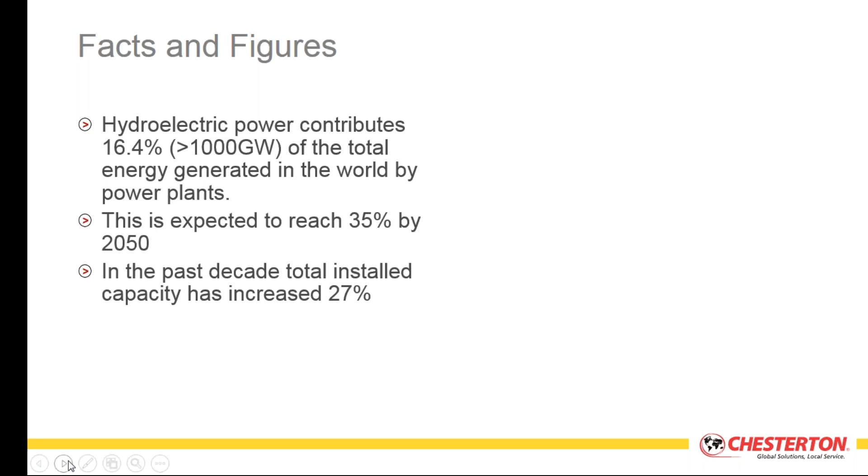In the past decade alone, we've seen an increase of over 25% of installed capacity. So it's a growing market space, and as it grows we're going to see more and more problems occurring. One of the first problems we're going to notice is that the water volume, the access to usable hydraulic head, is dropping. As we drop, that's going to have an impact on systems, particularly in the hydroelectric turbine runner blades, where you might experience cavitation.

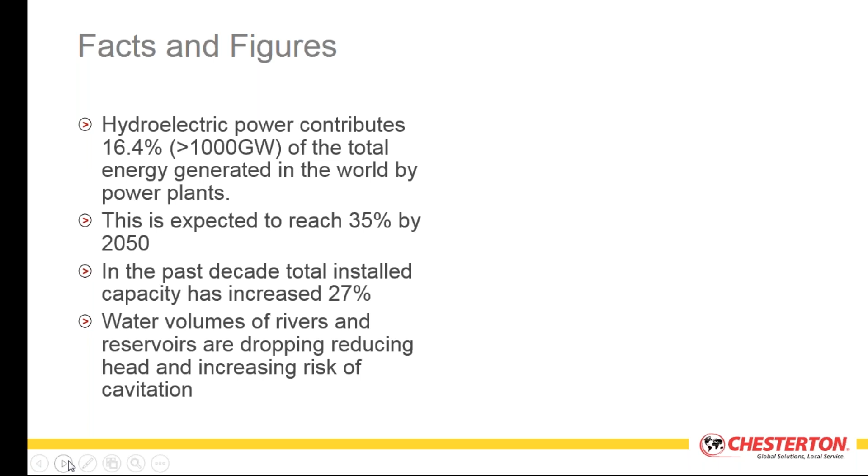But you'll also see decreased flow, and that's going to decrease the power off the grid. An example of this is you can see the water levels in Lake Mead in the United States that feeds the Hoover Dam. That water level has been down 27% in 2016. It's very seasonal, but protracted years of drought have caused that level to drop significantly, and that's having an impact on the Hoover Dam's power production, a 27% power reduction at that point.

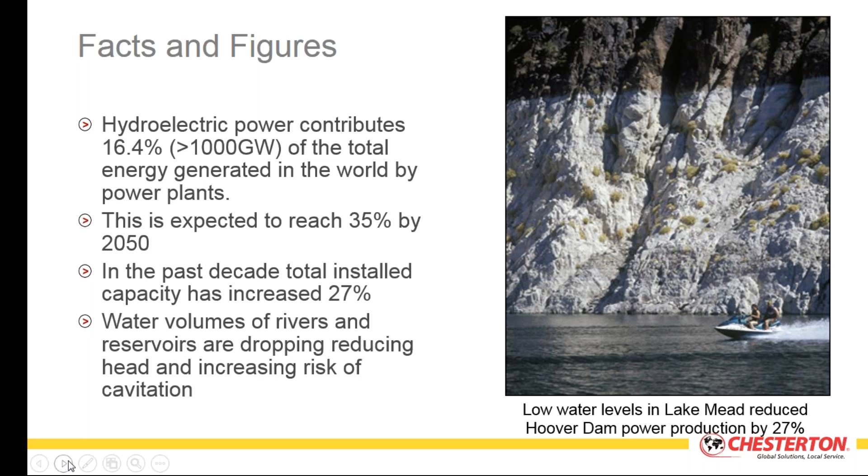So we have some issues to deal with, environmental problems. Some of those are Mother Nature, but some of these are going to be electrochemical issues that we'll talk about now.

Within the corrosion market space, the National Association of Corrosion Engineers did a study several years ago that looked at various industrial market segments and what the cost of corrosion was. It was identified that of the 3 areas reviewed in power generation - fossil power, nuclear power, and hydroelectric - by far the lowest cost of corrosion of the 3 was hydroelectric, but it's still significant.

In that instance, we're seeing corrosion in the maintenance of structures associated with the plant itself. This would be the powerhouse, the dam, and the associated structures - the electrical power plant itself, which would include both the electrical generation area as well as the hydraulic turbine area.

The highest cost impact overall is to the water wheels, turbines, and generators. If you look at the lower table there, you're seeing that comprises about 25% of the total cost of corrosion. On a weighted factor basis, it's the highest component of weighted cost of corrosion, so that's where we really want to focus. That's one of the high areas of visibility, and also one of the areas most prone to corrosion damage.

The NACE study, in its summation, estimated the cost of corrosion in your operations and maintenance budgets is about $75 million a year for the US. So if you took that $75 million and divided it by the megawatts or gigawatts generated, you could pretty much see what the cost of corrosion is per gigawatt generated, and apply the same numbers to your own region. So there is a significant cost associated with it, and it's important that we all recognize and understand that cost, because that's what we're trying to drive down.

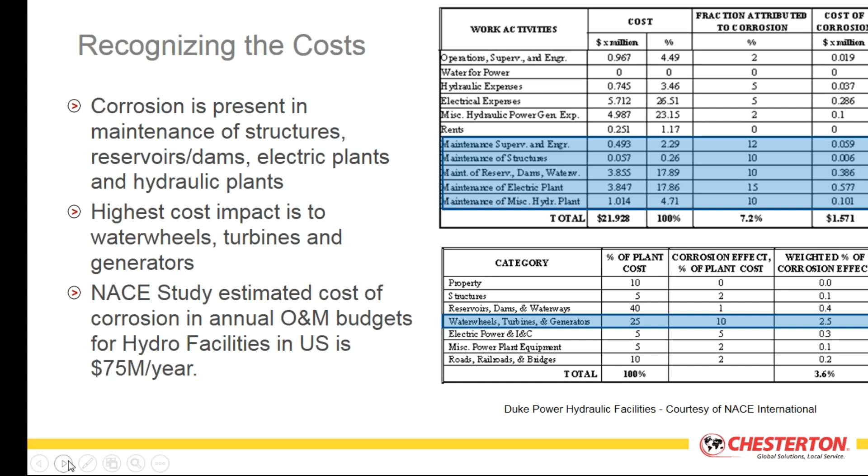We're trying to drive down our operational and maintenance budgets to make this power generation process a more cost-effective and cost-efficient method. Now, when we look at corrosion occurring inside the plants themselves, we do have some significant issues.

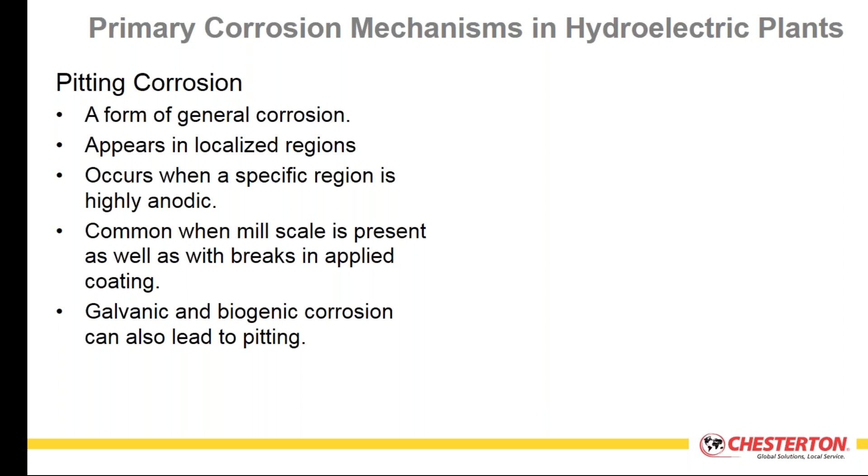One of the first forms of corrosion we're going to see is pitting corrosion. Pitting corrosion is related to general corrosion, but it appears in a very localized region, normally in a specific area which is highly anodic, meaning it is more active and more prone to corrosion. One issue that drives that problem is mill scale or oxides on the surface. Those oxides are passive. If those oxides are removed or broken free, a new area of exposed metal is exposed, and that becomes the new anode, and pitting corrosion will occur.

If those oxide layers are removed by erosive flow, by impact, by mechanical stress, you have a small anodic region which is now exposed, and pitting corrosion will be initiated. There is an active ion transfer from the bottom of the pits to the top, and in those lower regions, the pH will be measured significantly lower than the pH at the top of the pit, and that will increase the electrolytic reactivity, which accelerates the corrosion cell.

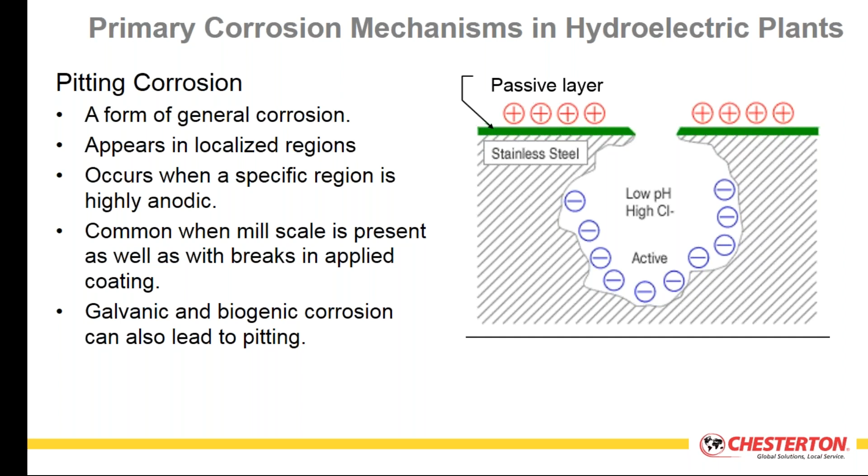Pitting corrosion tends to be more localized. It tends to drill down into the steel as opposed to spreading out generally across the surface, and it can lead to pinholes, breaks, and significant catastrophic failure. It's very difficult to identify and catch in time unless you're doing regular inspections, but pitting corrosion is one of the areas we will be focusing on as restitution correction methodologies.

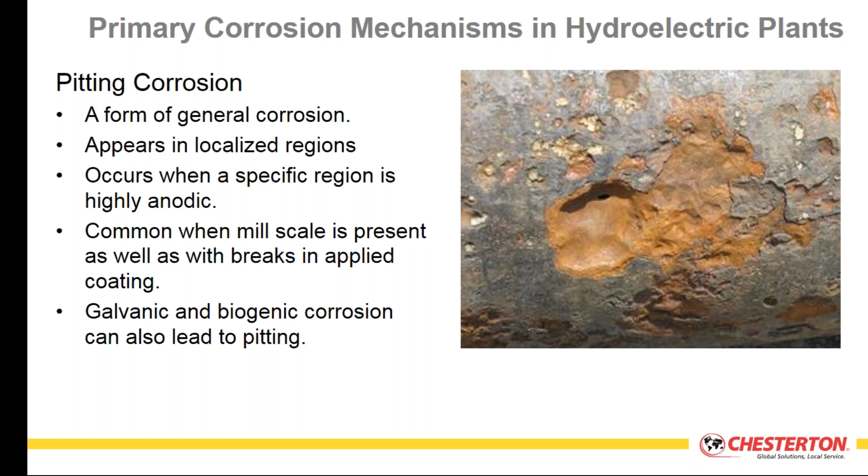Here's an example of what pitting corrosion looks like. You can see the associated scale on the surface, and where that scale has been removed, the new area has become exposed - that's the anodic region. At the bottom of that anode, you can actually see the hole penetration through, and that's a piece of 9mm plate steel, so that's a significantly reactive pit there. It's probably in the range of about 12 millimeters across, roughly half an inch, and about 9 millimeters deep, so about 3/8 of an inch deep, right through the steel.

Another form of corrosion that you might see in hydroelectric facilities, not just in the actual operational equipment but also in the supporting structural steelwork, is crevice corrosion. This also occurs in a localized region, and it's typically caused by low concentrations of oxygen, which are present in the gaps or crevices.

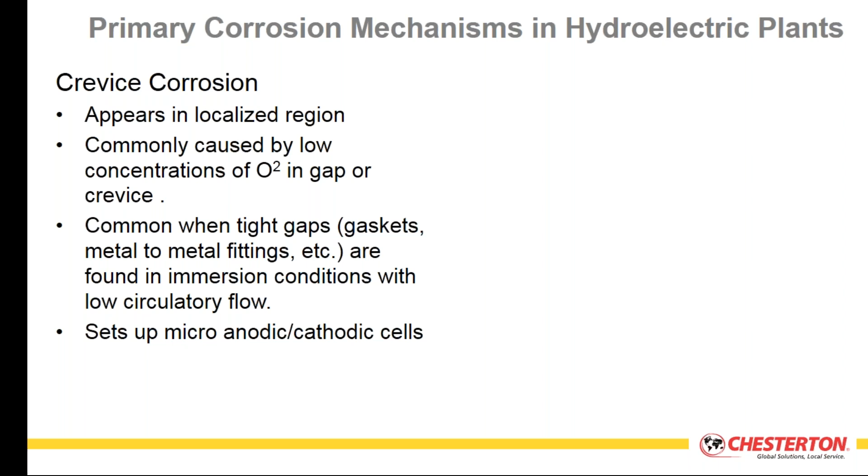Where are you going to see these gaps and crevices? You'll certainly see them in gasketed flange faces, metal-to-metal fittings. You may also see them in areas where you have stagnant flow or no flow conditions. When those types of situations occur, you'll set up very small micro anode-cathode cells, and that will also lead to a form of localized corrosion, called crevice corrosion because it typically occurs in these regions noted as crevices.

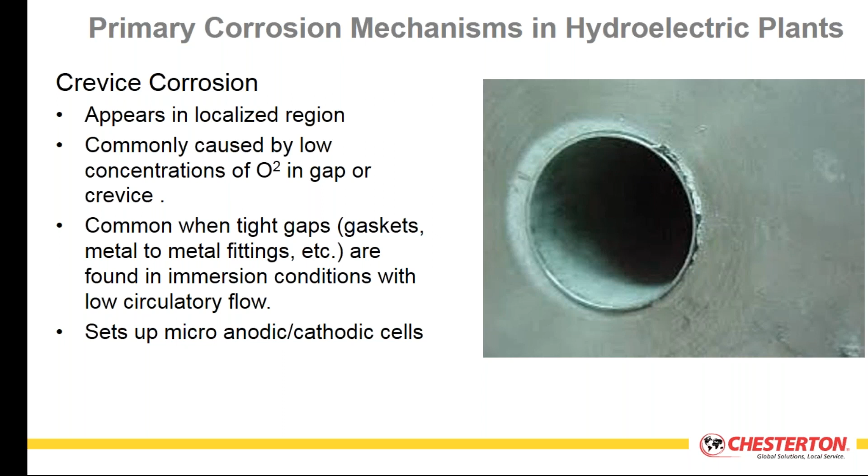An example of this in a heat exchanger system would be the welded joint between the tube and the tube sheet plate. That small crevice region becomes depleted in oxygen. You'll get active corrosion cells generating in there, where areas become more anodic than cathodic, and that precipitates the corrosion. You may also see it in structural steel reinforcing areas where you have gaps on riveted structures or skip welded structures. Those gaps become zones of low oxygen concentration, and you'll get oxidation and corrosion occurring.

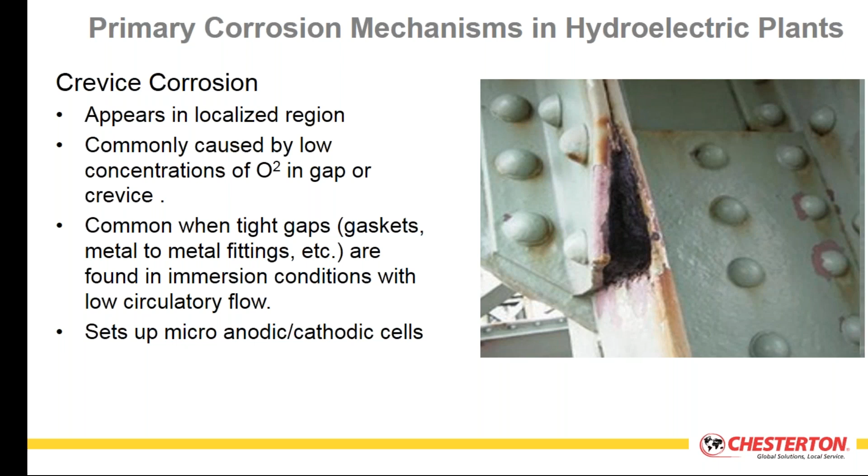As the metal oxidizes and converts to a metal oxide, it expands volumetrically, and that causes stresses and can actually break and pop rivets and cause structural failure. So crevice corrosion is also a problem. Some of these issues can be addressed by conventional maintenance technologies, but some may require more advanced technologies. A third form of corrosion that we sometimes see is galvanic corrosion.

This is a fairly common form of corrosion. It's typically related to dissimilar metals in contact with one another. These dissimilar metals have differing electromotive potentials, and that electromotive potential drives the corrosion rate. Certain metals are more active, certain metals are more passive. An example would be a pure alloy like gold, platinum, or silver - those are pure metals and tend to be very cathodic.

When you move to the very active anodic region, you're looking at metals like magnesium or zinc, which are highly reactive. If there is a significant differential between the anodic material and the cathodic material, the rate of corrosion will be quite high and fast. If the electromotive potential differential between the two metals is quite close, then you'll have slower corrosion rates, but you will still have corrosion because there is a differential in electromotive potentials.

In order for this to occur, it normally requires some type of conducting electrolyte - water is a very convenient one. Obviously, the more acidic or higher ion concentrations you have in the water, the more rapid the rate of corrosion will be. Another requirement is metal-to-metal contact, so you need these differing alloys in direct contact. They can't be separated by any dielectric insulator because there is actual current flow occurring between the anode and the cathode. So for galvanic corrosion to occur, you need an anodic metal, a cathodic metal, a metallic path which is the metal-to-metal contact, and a conducting electrolyte.

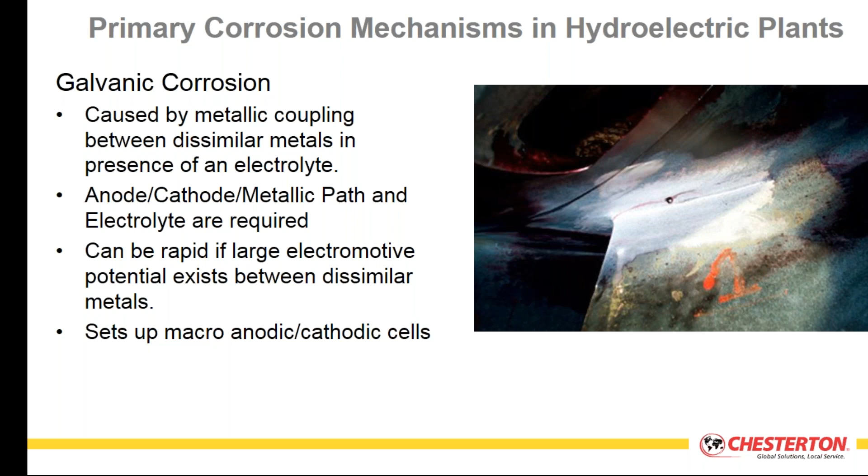Another form of corrosion that we see in hydroelectric facilities is erosion corrosion. This is typically caused by the corrosion mechanism, which is metal's natural state wanting to revert back to its passive native state.

If that's a ferrous-based oxide, you typically look at ferrous oxides. If you're looking at stainless steel, you're looking at chrome oxides. When these oxides form on the surface, they become passive, and these passive layers are the metal's own natural method of trying to provide protection. It creates a passivated layer on its surface, which is no longer reactive to the environment. However, that passive layer is very weakly bound to the base metal, and it can be easily washed away.

So in turbulent flow regions, which are quite common in hydroelectric facilities, that can wash away that weak oxide layer. If there is any type of sand, silt, or suspended solids in the flow, you'll start to introduce abrasive conditions, which will accelerate that erosion rate. Once that passive oxide layer is removed, you'll see accelerated corrosion occurring in that region where the oxides have been removed.

This is a repetitive and cyclic process that occurs over and over. As the oxide layers are removed, the metal is thinning, structural conditions are being reduced, and so we have to be concerned about this. This is most common in your very high turbulent flow application areas.

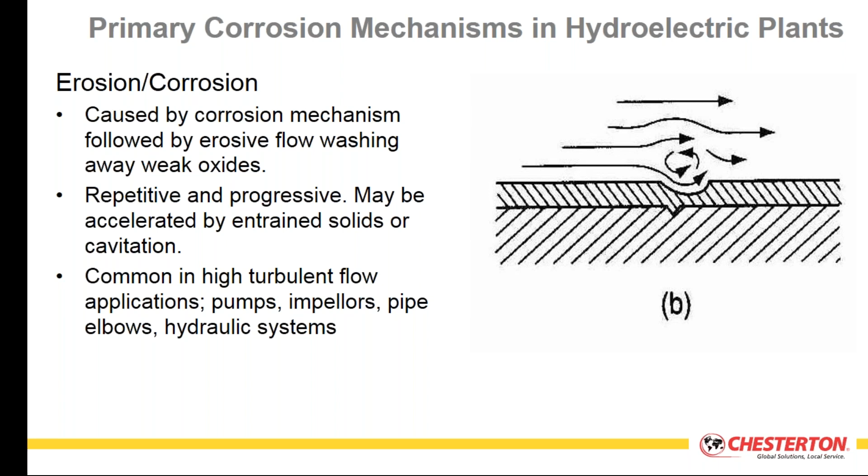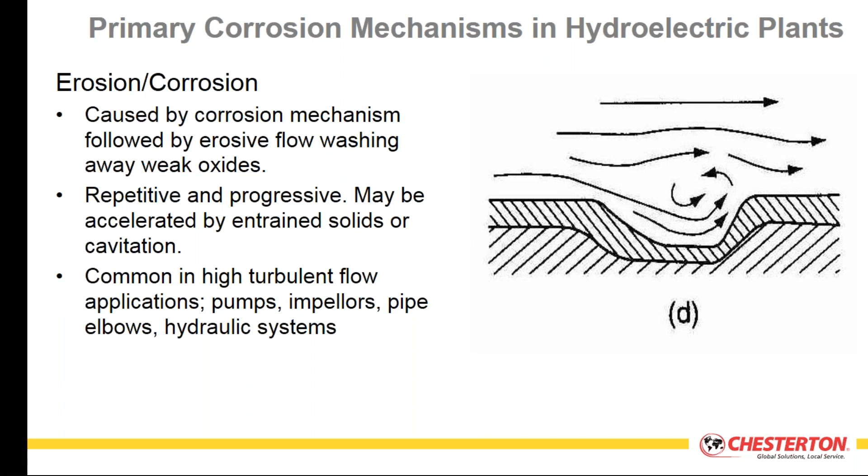This progresses over time until eventually the oxide layer is removed, and now you're starting to remove the base metal because that base metal is repetitively oxidizing, and then that oxide layer is being removed, and the cycle repeats itself over and over again. Eventually, you will see accelerated erosion factors occurring in localized regions, and these are areas of specific damage that we need to be able to address.

But you will see erosion corrosion occurring in your hydro runners. You'll see erosion corrosion occurring across the wicket gates. You'll see erosion corrosion occurring in your scroll casings around the turbine runners.

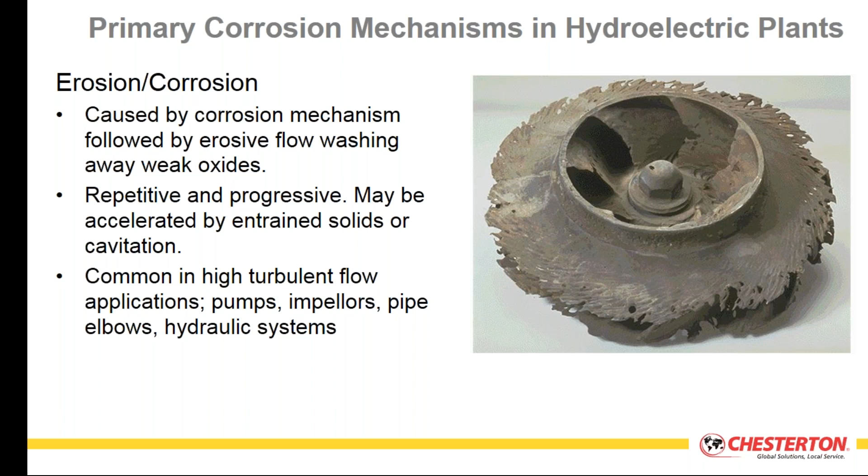Another form of corrosion, which is actually a mechanical method of attack, is called cavitation. Cavitation is quite common in hydroelectric facilities. It's typically caused by low pressure regions which develop in the trailing faces of the turbine runner blades. The air bubbles in the water implode on the surface under extremely high force.

Forces of several 100,000 psi have been calculated, and it's also been established that for microburst periods, extremely high temperatures are also generated across that surface. So those two forces of mechanical stress and thermal stress actually accelerate the damage to the metal. Once that metal becomes roughened, you start to promote more cavitation, because cavitation likes to operate in rough, irregular surface regions where turbulent flow is more prone. So if you can keep a surface smooth and uniform, that will reduce the effects of cavitation.

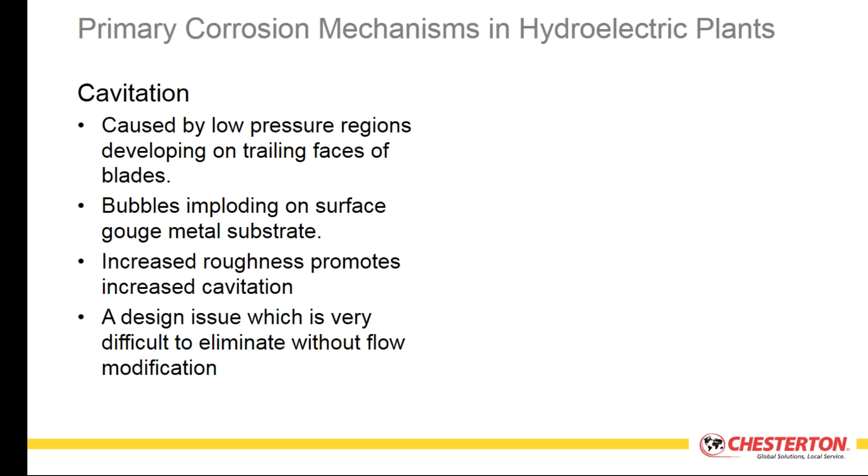First and foremost, though, it should be recognized that cavitation is a design issue. It's an issue that should not be counted on as being able to be eliminated by any restorative method. All you're doing is repairing the damaged area, but damage will occur again. It's very difficult to eliminate cavitation without impacting or improving your process flow to eliminate those low pressure regions.

When you see cavitation occurring on a hydro runner, you'll see the surface looks like it has been frosted or etched. It typically is in fairly localized regions near the trailing edge of the turbine runner blade, on the low pressure side. These are areas where we want to be able to address, because these are areas of high likelihood of damage occurring in your hydroelectric plants themselves.

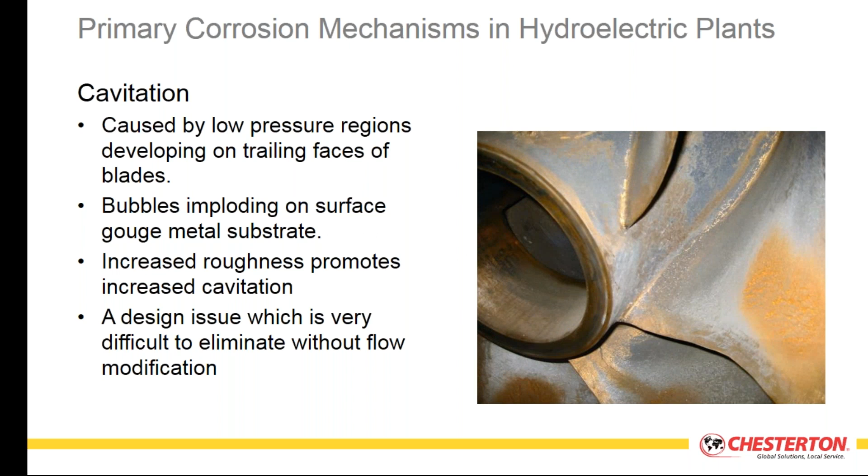You can see the level of damage and how it can be severe and actually penetrate through the actual runner blades and cause structural failures.

You'll also see throughout the plant what we call general corrosion. This is the exact opposite of pitting corrosion. It's much more uniform across the surface because areas across the metal are becoming anodic and cathodic, constantly changing. The rate of attack is much more measured and progressively slow. It tends to occur uniformly or generally across the entire surface - it's not localized.

The same corrosion factors are occurring in that you're finding areas which are anodic and cathodic. The anodic region is sacrificing itself, in effect rusting or oxidizing away, while the cathodic area is protected. The issue in general or uniform corrosion is an area that is cathodic may become anodic, and an area that is anodic may become cathodic over time. So it is very random across the surface area.

The overall effect is the metal loss is relatively slow, and it's easy to assess lifetime. In design factors, if you know what the general corrosion rate is, you can design your structures with enough metal to absorb that loss over the lifetime expectancy of the equipment. But when we see general corrosion in hydroelectric facilities, it's mostly attributed to structural steel type applications.

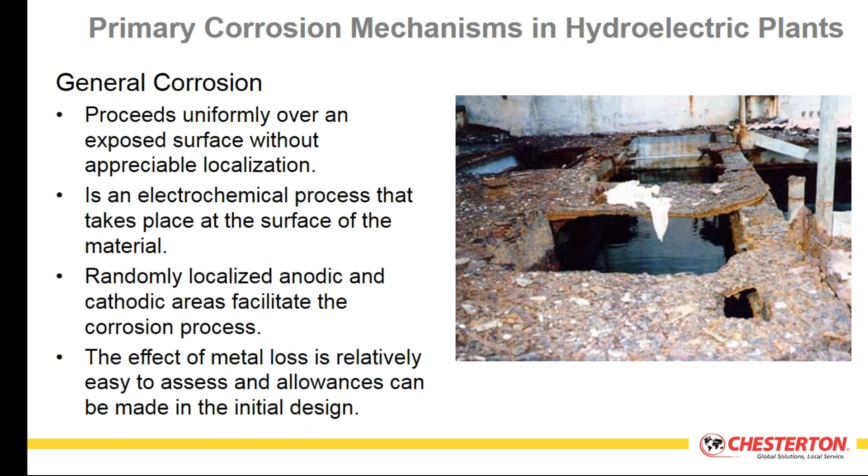Another form of corrosion we'll see in steel, particularly steel areas, is stress corrosion. It's called stress corrosion because it's actually a combination of mechanical or thermal stresses, which can be accelerated by certain environmental conditions. One of the most common stress forms is tensile stresses, where the metal might exceed tensile stress, and this would be quite common in what you see here - a Francis runner blade, where you have an area of stress corrosion occurring at the regions of weldment.

It's important to understand that in any welding application on any metal surface, the heat affected zone of the weld, which is a region roughly 5 centimeters or 2 inches away from the actual weld pool, these regions are more prone to corrosion due to insufficient or improper heat treating. So you'll have areas within the metal grains themselves which are much more prone to corrosion than the actual grain itself. It's the grain boundaries that create the corrosion cells.

This can be eliminated by effective heat stress relieving - heat pre-treating prior to the weld and then post-treating after the weld - and making sure that the welding itself is done properly by highly skilled individuals using the proper equipment and welding materials.

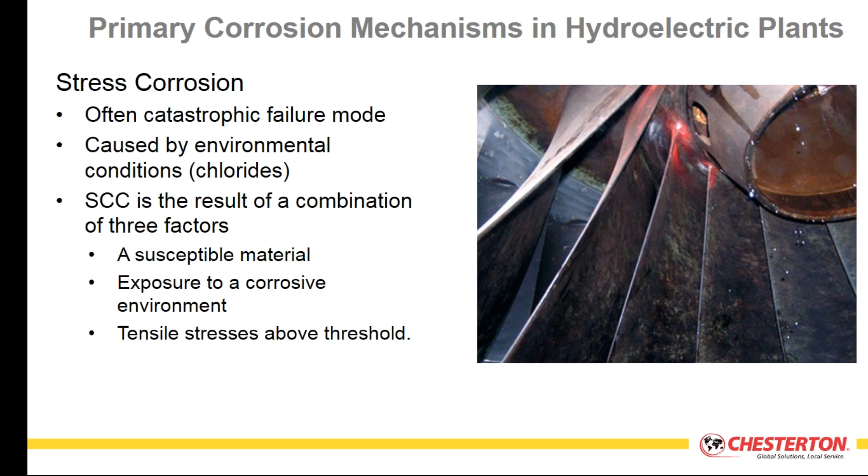There are some traditional engineering and maintenance practices and activities commonly used to address some of these forms of corrosion in your plants. The most common one is cavitation repair, and we'll talk about that in some detail because this is probably one of the larger issues you'll see in the powerhouse system.

The most common cavitation repair technologies are a metal-to-metal process where you're actually repairing the damaged metal with another metal, accomplished through a weld overlay and grind process - welding on beads of metal onto the damaged area and then grinding everything flush and smooth. Another option is simply replacing the worn parts. Obviously that has a cost impact and potentially a lead time and scheduling impact, so it may not be the first choice, but it might be an ultimate choice in severe situations.

Becoming more common is the utilization of thermal spray technologies, which we'll talk about in some detail now.

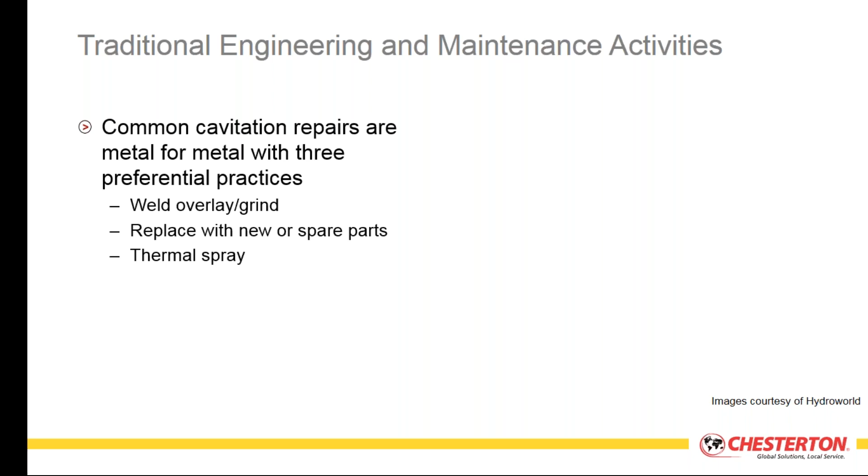Your basic weld grind area requires fairly extensive rigging. There's specialized technologies and skill sets required. You are generating a somewhat hazardous work environment due to the welding fumes and obviously the fire and flame that might be present, so environmentally and to the worker itself it could be a potential safety hazard.

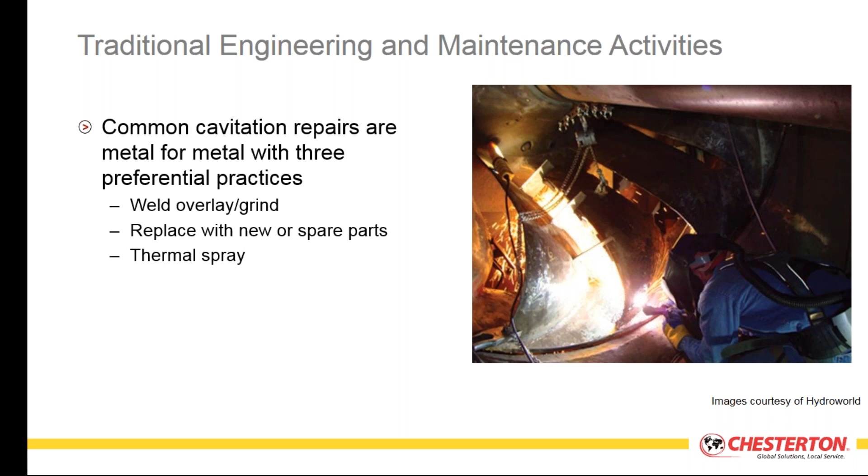But as far as the actual process itself, if it's done properly and effectively, it can be quite beneficial. If it's done ineffectively or improperly - meaning they don't provide proper pre-treating or post-treating of the steel, or don't use the proper weld materials or welding techniques, or are unable to grind everything smooth and flush again - they can actually accelerate and make the problem more difficult and more progressive.

You can see some of these weld areas and grind areas are quite significant, so there's going to have to be a significant amount of post-treating after the welding as well as pre-treating.

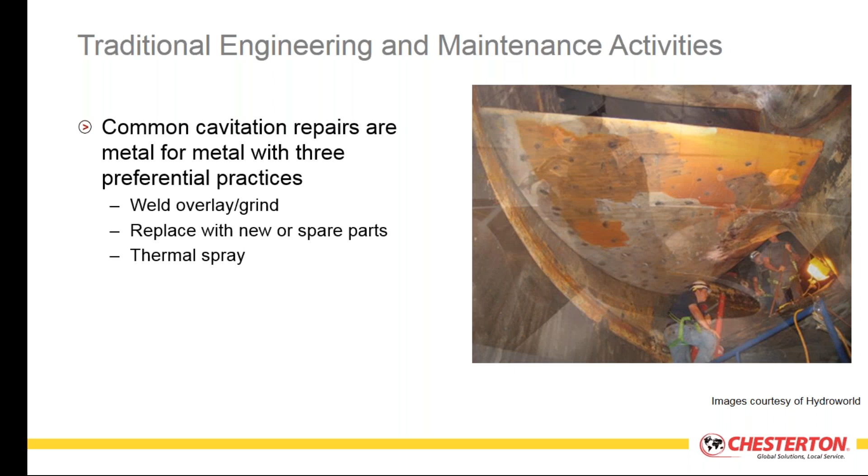Thermal spraying has become more and more common. It's basically what's called a high velocity oxygen fuel derived method, where you are passing under high velocity airflow either a metal powder or a rod fed into a high velocity airstream. As it passes through an arc, that metal rod, wire, or powder is liquefied in that arc flame and is then thrust and forced upon the surface, where it coalesces as a hard metal.

Common metals used here are tungsten carbide, chrome carbide, but in some instances, in certain industries, they're doing thermal sprays with ceramic-based materials.

When using this system, it's very important to have the metal surface preheated so that it is properly wet out by the liquefied metal when it impacts on the surface, and it properly cures there. One issue with thermal spray-based systems is they tend to be quite porous, so if corrosion is occurring, the thermal spray system may not be as effective.

It is possible to build these thermal spray systems up in successive layers to several millimeters or fractions of an inch, and they can be quite beneficial in certain highly abrasive applications.

Some of the concerns we have with these metal-to-metal repairs, obviously, is the heat distortion factor. We're concerned about that, and it has to be resolved and addressed by pre-treating and post-treating.

We're also concerned about the heat-affected zone, the actual weld pool, and the region directly adjacent to it. Those areas are more prone to corrosion, so we need to be confident that the weld has been properly inspected and verified as smooth and clean. We do that so we can eliminate the effect of stress corrosion at the welds.

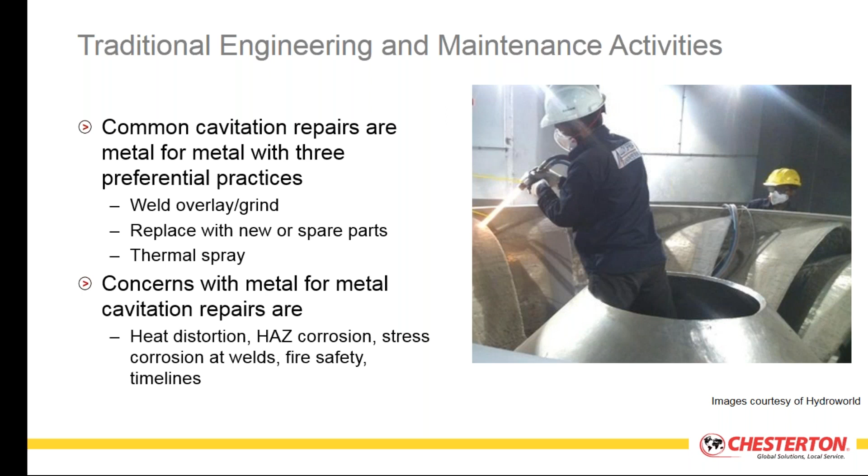We're always going to be concerned about worker safety in these areas. If we don't have to introduce flammable or explosive gases, or create hazardous or toxic welding fumes, that can be a big benefit for improving turnaround time and worker safety.

Beyond the traditional metal-to-metal repair approach, we want to talk about some of the polymeric approaches, because polymers are plastics, and plastics are quite resistant to many forms of corrosion. Virtually all of the forms of corrosion we've discussed so far—pitting corrosion, crevice corrosion, galvanic corrosion—are easily addressed by polymeric materials.

Stress corrosion may be more of a problem because you're not addressing the structural aspects of the base metal. All you're doing is putting a surface enhancement on it. Cavitation is another area that can be addressed by polymeric coatings, but you're not eliminating the forces of cavitation—you're reducing the effects, allowing the coating itself to be the sacrificial material as opposed to the base metal.

So polymers are quite popular because they naturally resist corrosion, and there's a wide range of polymer-based systems. Probably the most common are the epoxy-based materials, which are co-reactive polymers based on bisphenol A, bisphenol F resin chemistry. Normally they're an amine-cured structure, so they're what we call chemically co-reactive coatings.

When the two components are mixed together, they start a chemical reaction which will convert that material from a liquid to a solid-based compound over time. They're called thermoset-based polymers because during that reaction process, they actually generate exothermic heat reactions, which participate in and accelerate the curing process.

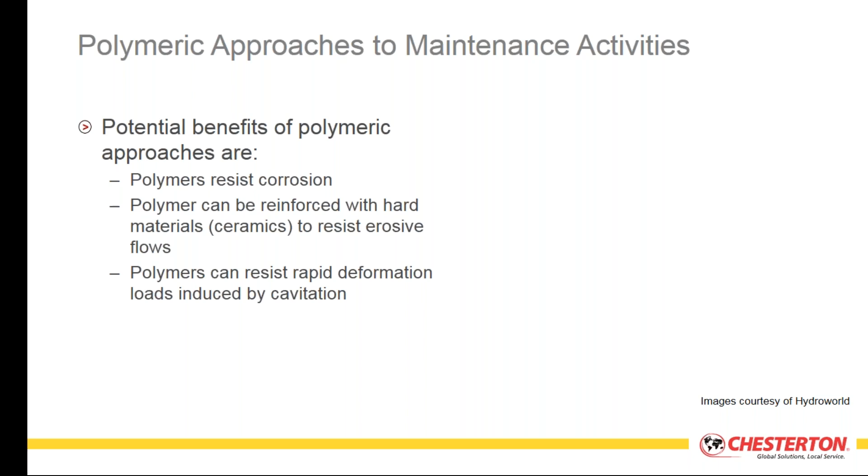However, if cavitation is relatively slow and progressive, you may be able to use a polymer-based compound quite successfully to address and repair those zones of cavitation, with the understanding that when you come back in on a maintenance cycle 3 or 5 years later, you may need to do some more touch-up to those areas. Now here's some examples of polymer-based coatings on hydro runners.

You can see them being used on wicket gates for corrosion resistance as well as erosion resistance. You can see them in some of the scroll casings and vanes, turning vanes inside the runners, where you're seeing areas of high erosion and high abrasion.

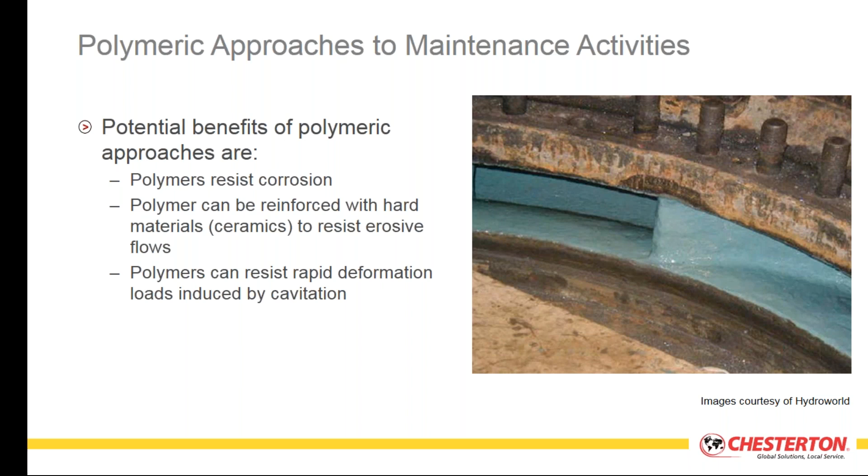These materials could be multi-coat systems. You may be using a paste grade or putty grade material that is used to build up worn regions, in effect using the same technique that's used in the welding approach, where you're building it up and then grinding back down. With coating systems, you can build it up and finish it to the desired thickness. If you do require machining or grinding, it's quite easy to grind, and you're not generating heat stress into that base metal, because the polymer itself is not going to react that way. So the polymer-based compound gives you more flexibility.

Now, there are very defined coating characteristics that we want to see in a hydroelectric coating solution. We want to make sure that the product is able to be applied in confined spaces.

And this is a great concern, particularly based on the accident that occurred at the Xcel Energy about 6 or 7 years ago out in Colorado. In that instance, several workers were killed in a fire that occurred in a penstock. The fire occurred when a flammable solvent was ignited inside the penstock. The workers who were downstream of the fire were able to be evacuated, but the workers who were upstream had nowhere to go, so they moved upstream from the fire to the point where they could no longer climb up the incline. That's where the rescuers eventually found them in the recovery process.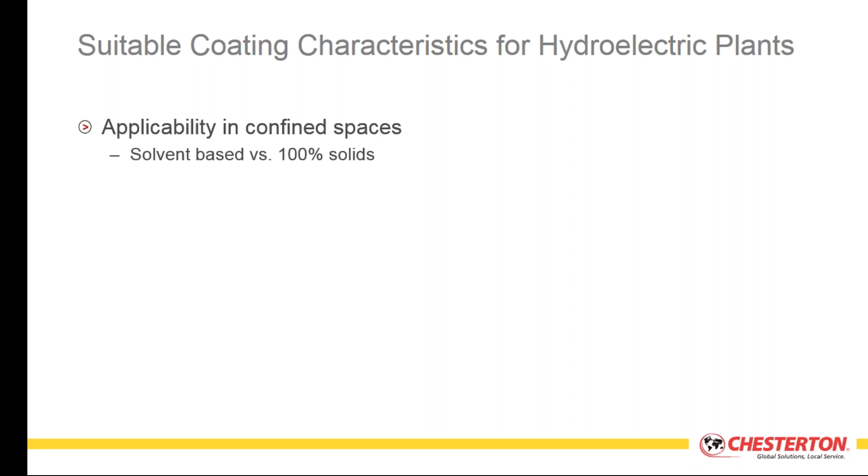It was essentially due to the fact that they were bringing flammable-based compounds into a confined space. So whenever you can remove the presence of flame in a confined space, you're obviously going to improve the safety and the work environment. We want to avoid fire, we want to avoid explosion, we certainly want to avoid toxic fumes whenever possible.

We want to make sure that the coating system itself has very high adhesion properties, because the most common mode of failure of any coating on the surface is loss of adhesion. It tends to delaminate. Sometimes that loss of adhesion is due to improper surface preparation or the degree of surface preparation that was accomplished. But it's very important to ensure that you have very high tensile adhesion forces of your coating system to get a positive bond to the base metal to provide long-term performance.

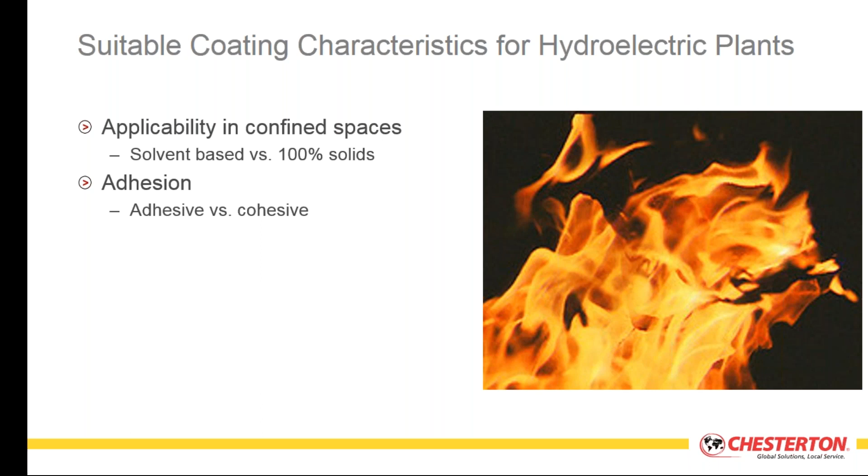You want to see, whenever possible, cohesive failure as opposed to adhesive failure. And the beautiful thing about epoxies is that they were developed initially as an adhesive compound. That's what they were developed for back in the early 30s. These adhesive compounds develop extremely high tensile strengths so that then when they fail—and all coatings will fail, all materials will fail at a certain stress point—with these types of coating systems, they fail cohesively.

And that's what you want to see. So the left-hand image is the mode of failure that is desirable in a coating system. It means that the coating's adhesive properties are greater than their cohesive properties. So even if the coating does shear somewhat, there is always a protective layer left on the surface which will provide protection of the base metal.

And the nice thing about these epoxy-based coatings is they're easily repaired and restored in place. So it's not a very complicated process. It's effectively: dry the area, roughen it by mechanical means, ideally power tool, remove any debris and residue left on the surface, and then apply additional coating to the prepared surface area and allow it to cure. The curing process can take some time—anywhere from several hours to a day or so, depending upon the temperature in the application area.

We want to make sure that the product has good erosion resistance, because hydroelectric systems are exposed to tremendous amounts of erosive flow. High volumes of water moving through confined spaces, going from laminar flow to a radial flow type of application, so there are directional changes that accelerate the rate of erosion. So we want to make sure the material has good hardness. High hardness can be imparted not just by the epoxy itself, but also by the reinforcement. When we incorporate harder reinforcements like silicon carbides or aluminum oxides, the material develops a Mohs hardness approaching that of diamonds. Ceramics used in many of these coating systems can be as high as 9.8 on a scale of 10, and those materials will provide very good erosion resistance, and if there are particulates in the flow, they will provide good abrasion resistance to keep the polymer in place.

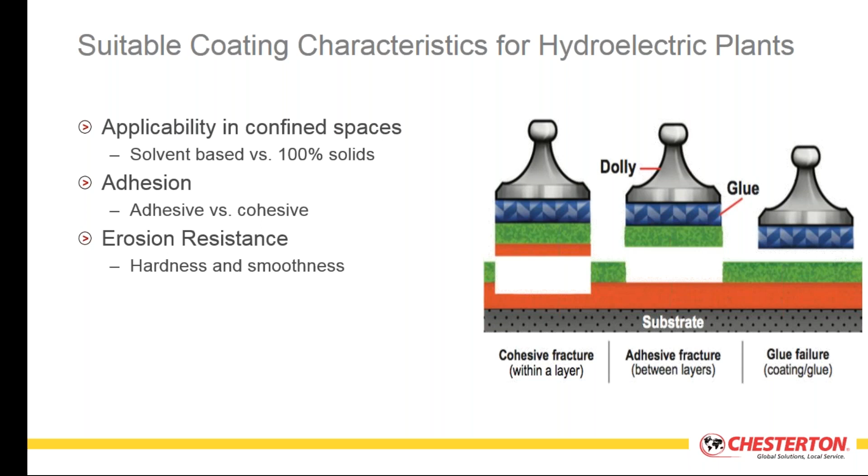Many of these polymeric-based coatings can also be applied in a very smooth, low coefficient of friction surface, and that's also going to improve performance over time. So being able to do rebuilding and fairing in these areas which are subjected to erosion is important.

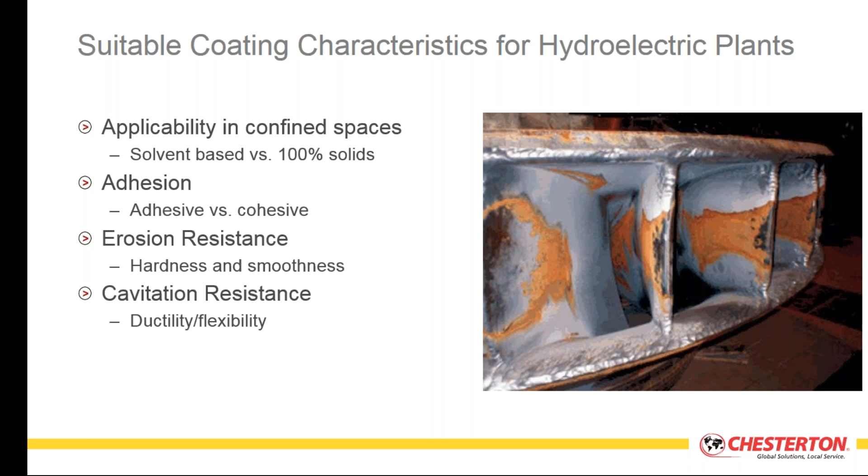We want to focus on cavitation resistance capability. The benefits of the polymer-based compounds, as I said earlier, are their ductility and flexibility. They can absorb the rapid deformation impact of the cavitating air bubble, and they're flexible over time, so they give good performance. They're not going to eliminate cavitation, but they can be used to repair zones of cavitation, to prevent accelerated cavitation in those areas, but you will more than likely have to come back and do repetitive maintenance within your maintenance cycles. So when you start to see these zones of cavitation, these need to be addressed and repaired.

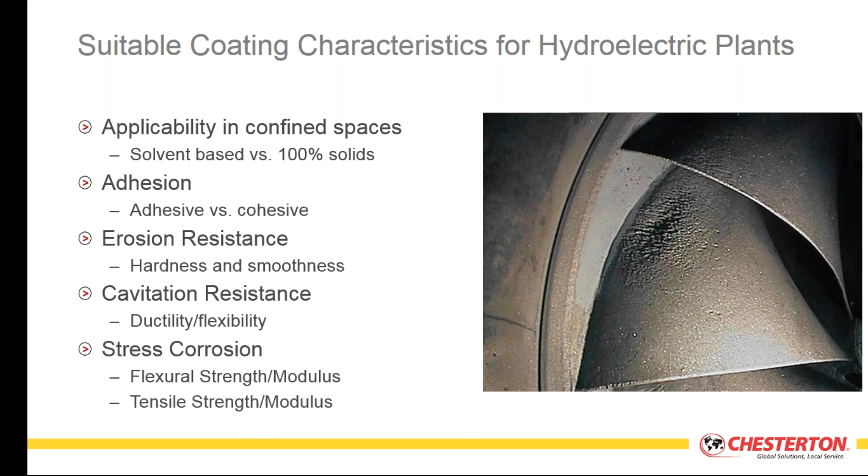And finally, stress corrosion, and this is an issue that comes up. There are both flexural stresses and tensile stresses that are going to be present in many of your hydro runners. When you see distortion of the metal, that's indicating significant tensile or flexural strains on that base metal. As you accelerate those strains, the zones of weldments become more prone to cracking, and those areas need to be protected.

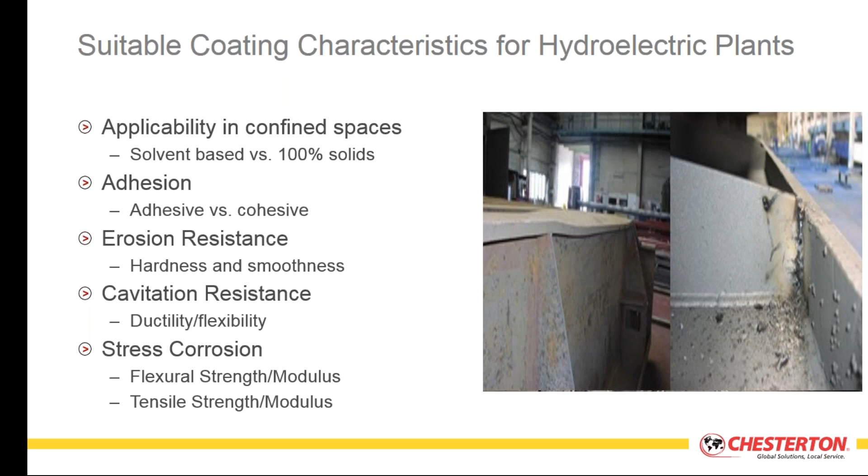So these are some characteristics we want to see in a coating system: the ability to resist flexural stress. That means they should either be low modulus materials, which become more flexible and ductile, and as long as they can resist the erosive flow forces, they're going to be beneficial. If they're so soft that they cannot resist the erosive forces and they are scoured away, nothing is gained.

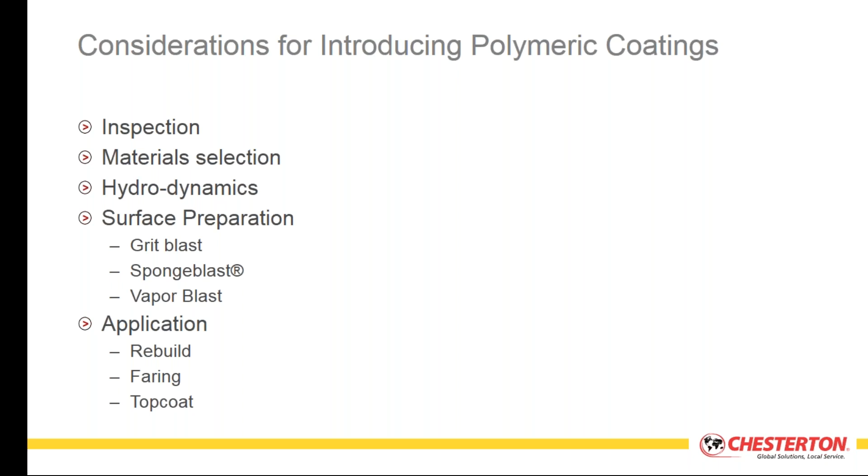Now, when we're looking at considerations, what do we want to consider when we're going to introduce a polymeric coating into your hydroelectric structures? There are certain things that we recommend be followed, and the first one is an inspection. You want to make sure the coating is suitable for the type of application you're anticipating. Sometimes a coating is not going to be practical. In those instances, you may need to rely back on base metal repair, spare parts replacement, or even thermal spray applications. So inspection is an important part of the process.

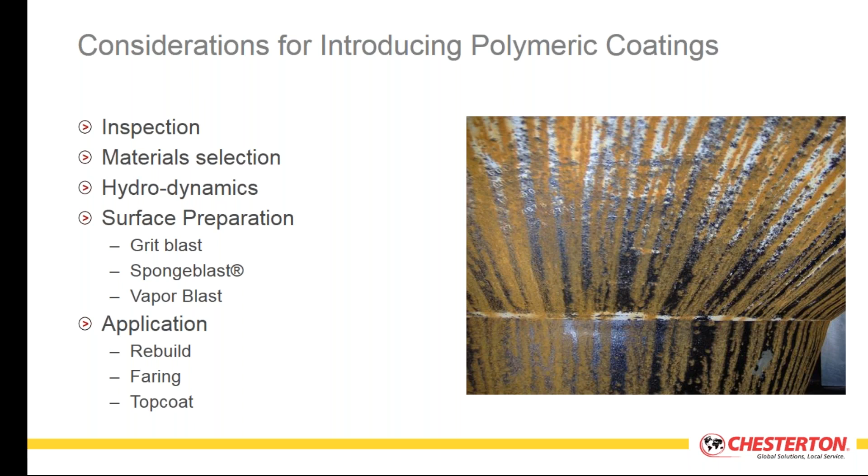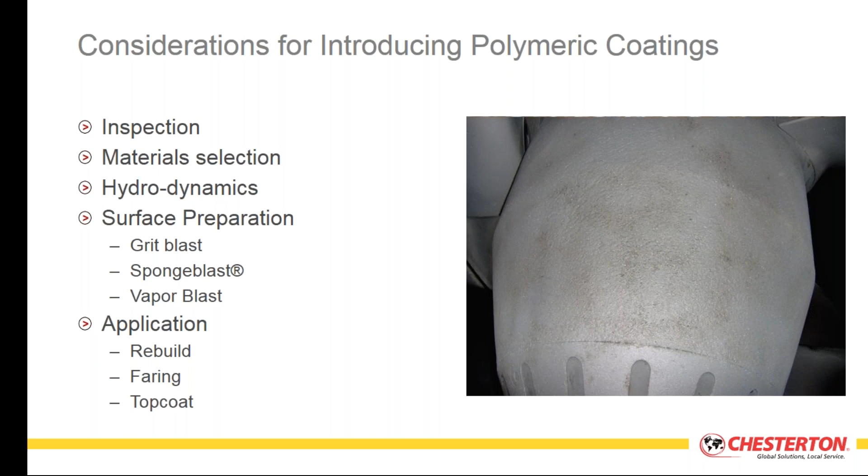You want to look at the base surface you're going to be reviewing and addressing, and identify the conditions of damage so you can make the proper selection of materials and steps to develop the process. The material selection may incorporate rebuilding materials used to resurface pitted and worn regions. They may then also require a top coat system which is smoother and more low friction, with better hydrodynamic characteristics that improve the hydraulic flow across the surface and reduce the forces of cavitation. So taking a material that is worn and pitted, rebuilding it using these fairing compounds to smooth the surfaces and fill the pits, building the metal back to its original dimensional clearances, and then applying top coat systems to smooth them out and give better performance.

Now, in order to address these applications, surface preparation is extremely important, and that will probably be, in my experience, the most expensive cost component of any polymeric coating application—the surface preparation and application. But this is an area where you do not want to cut corners. This is an area where you want to make sure you follow the manufacturer's instructions, that you provide the proper profile for mechanical adhesion.

You want to provide the proper environmental conditions for the coatings to react properly and cure within the stated time frames, that you use the materials in the proper sequence, that you're rebuilding and resurfacing before your top coating, and that when applying multiple coat systems you are meeting what's known as the overcoat window, which allows you to apply successive coats one over another without any additional surface preparation requirements.

If you were to exceed one of those overcoat windows, which are time and temperature dependent, then that would require you to re-roughen the surface, bringing back in your mechanical profiling process. So the process itself involves a fairly extensive investment in time and money.

The largest investment in time and money of any polymeric coating application will be addressed by surface preparation and application. My experience says it's usually somewhere between 75 and 80% of the cost of the job is surface preparation and application.

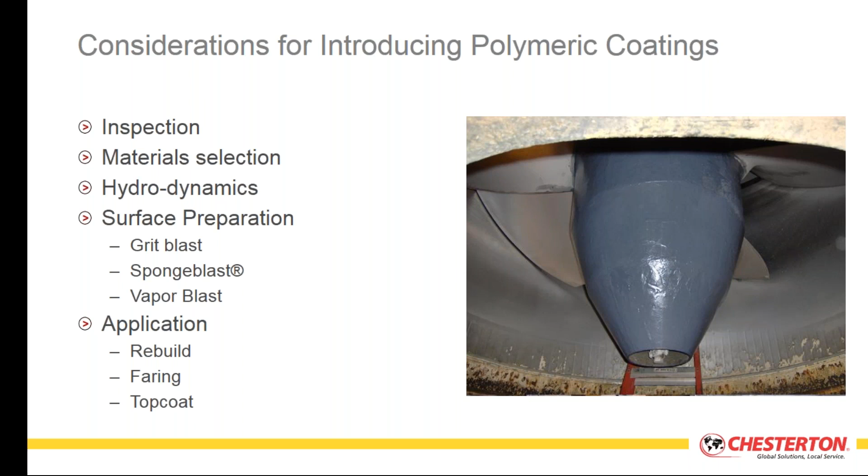But when done properly and done successfully, the coating systems then have the best opportunity to perform, and they become quite economical because you can affect these repairs quite quickly, in a matter of days as opposed to a matter of weeks with some of the more traditional methods. And there's nowhere near the amount of cost involved as far as rigging and heat stress relieving, both pre and post heat stress relieving.

So it's a more effective approach. We look at the coating systems as having the beneficial ability to provide erosion resistance, corrosion resistance to pitting corrosion, galvanic corrosion, crevice corrosion, erosion corrosion, cavitation, and by protecting the weld regions where you do have the potential for stress corrosion, we can eliminate environmental effects that can accelerate that stress corrosion cracking.

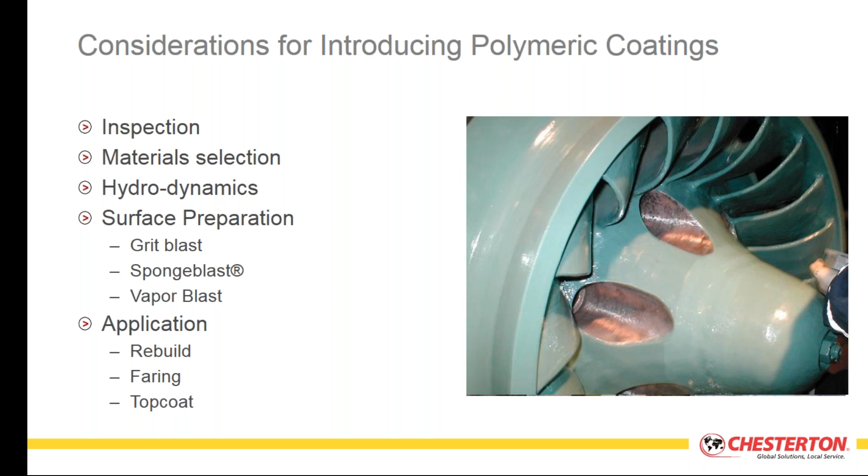Now, when we consider where coatings can be used within hydroelectric plants, they're used in many regions, not just in the powerhouse though. They're used in the scroll cases and the wicket gates. So this is areas where you're going to see high erosion corrosion forces.

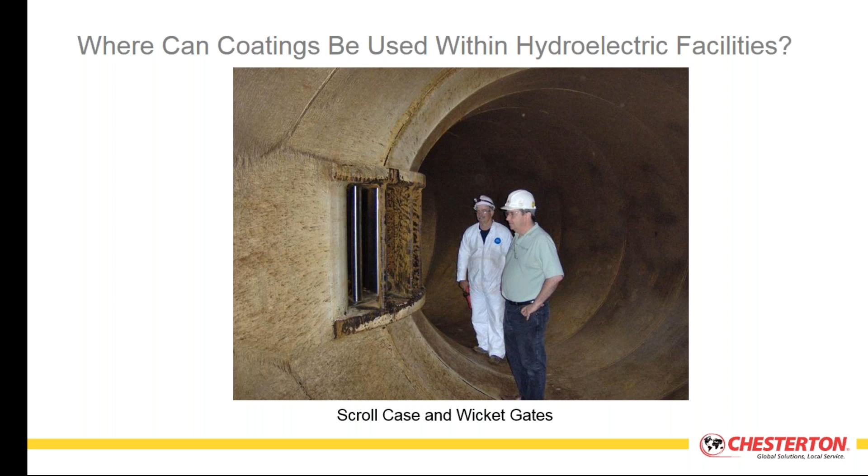You may see cavitation on the backside of the wicket gates. These are areas where you're going to see, if there is suspended solids, areas of high abrasion as well. The turbine bulbs themselves, the radial gates or tainter gates, these need to be protected.

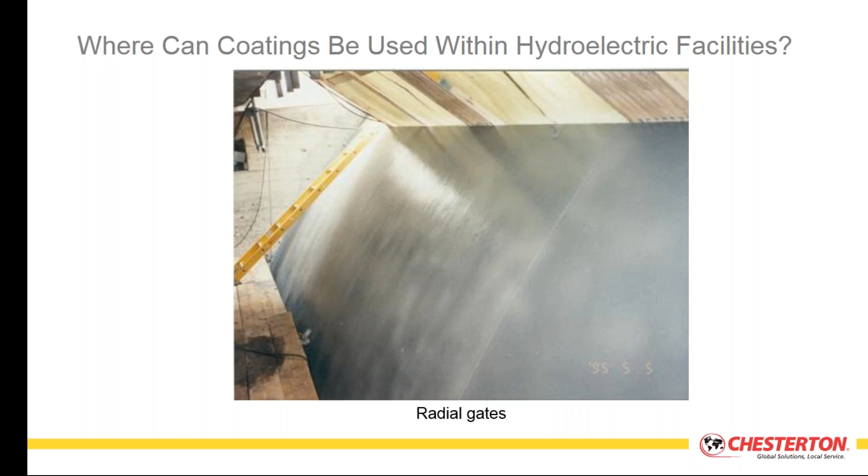These need to be associated with your dam structure as your relief valve basically for your dam. Both the upstream side and the downstream side can be protected with these types of polymeric coatings for extended run times and long life. Penstocks themselves, both riveted as well as welded pipe construction.

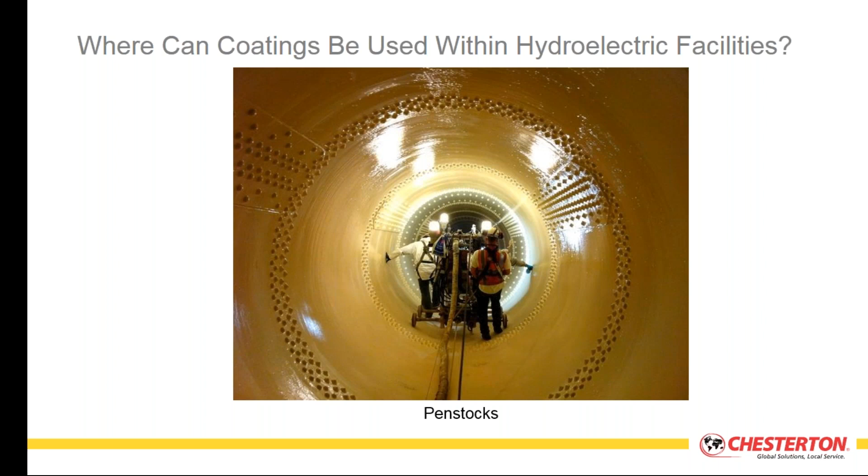These types of systems, long runs of pipe, typically at some angled pitch. There's going to be high velocity flow. Again, you're going to have corrosion occurring here. There may be isolation valves intermittently placed along these penstocks where you also have to provide corrosion protection inside the penstock to the valve itself.

The actual dams themselves, sometimes you're dealing with the nosings of the dam, particularly in the northern climates where they have icing structures and what we call frazil ice. Frazil ice will actually act like an abrasive compound and will wear away the weak concrete layer until it exposes the aggregate, and the aggregate will start to pop out.

When the aggregate starts to pop out, now the underlying rebar can be impacted, and then you're going to see accelerated spalling corrosion and more structural damage. So it's important whenever possible to provide coating systems on the upstream areas where frazil ice damage is prone to provide a protective layer on top of the concrete to prevent that type of damage from occurring.

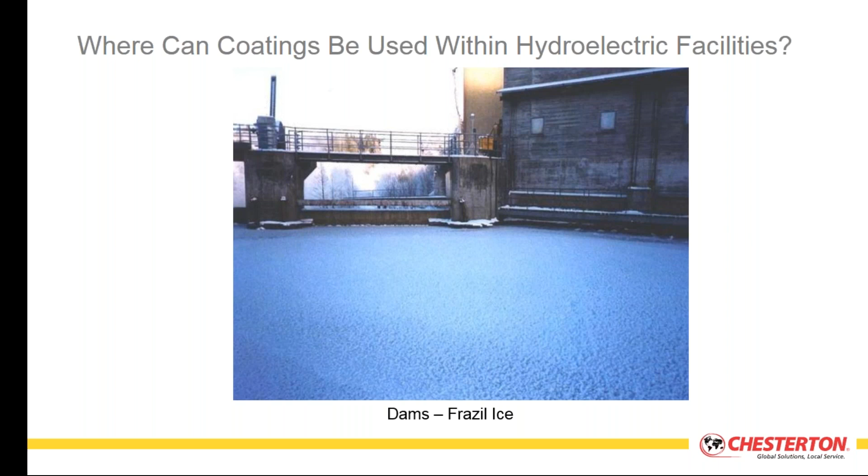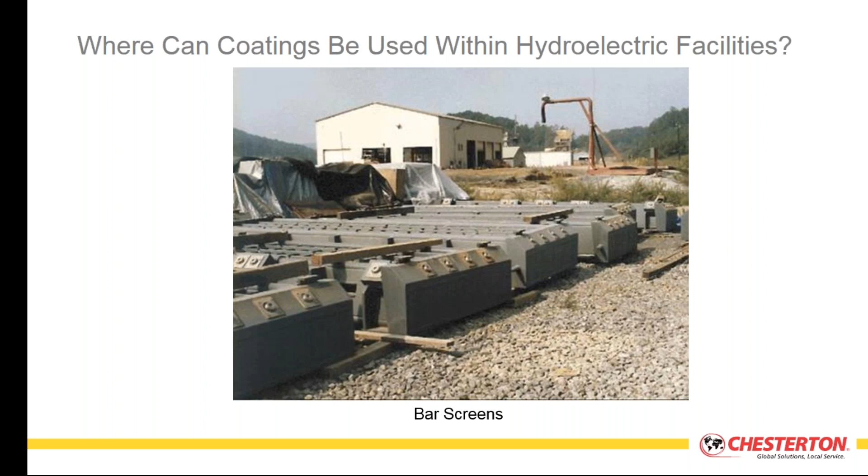Bar screens and some of the intake structures, trash racks, these are large coarse screens at the upstream side of the penstock. These are designed to filter out large floating objects that might get inside the penstocks and the turbines and cause mechanical damage, logs, boats, things like that that might be floating in the riverine areas.

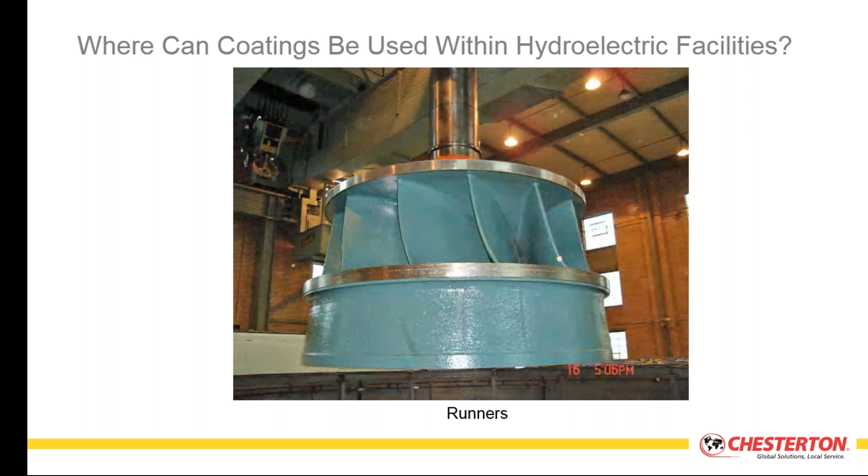The actual runners themselves need to be protected, and we're talking about not just the Francis wheel that you see here, but also Kaplan and Pelton style wheels. Wherever you're going to see erosion, corrosion, and/or cavitation, these are areas where you can apply these types of polymeric coatings and get good performance life for a longer period of time.

Concrete is chosen not because of its abrasion resistance or erosion resistance. It's chosen based on its cost and its structural strength under compressive loads when it's been reinforced. It's not a highly abrasion-resistant material. So in those instances, it might be beneficial to apply a more erosion or abrasion-resistant coating on top of the concrete, particularly in the high-flow regions. As you move up the walls where the flow is less pronounced or the velocity and impact damage is less pronounced, then you don't need to use a coating.

So these are areas where coatings are used quite commonly in hydroelectric systems, and they're used with a high degree of success.

To review them, I'd say that the areas associated with power production would be your bar screens or coarse screening systems, your intake structures, penstocks, any isolation valves as you move down into the powerhouse itself, the scroll case surrounding the turbine runners, any wicket gates or turning vanes used to convert that tangential flow into radial flow conditions, the turbine runners themselves, and the draft tubes below the turbine runners.